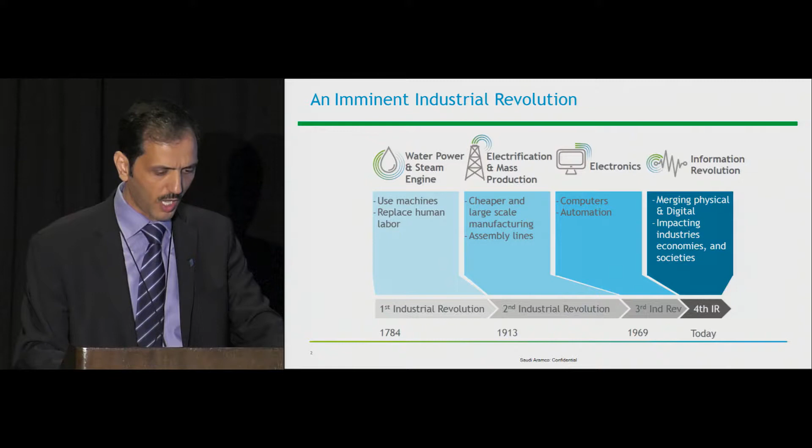And this is because of the advancement that we have seen as industry in artificial intelligence and machine learning as well as other technologies. So the real question to us in Saudi Aramco was how do we react to such, and are we benefiting from these technologies? And this is what I am going to cover in the following slides.

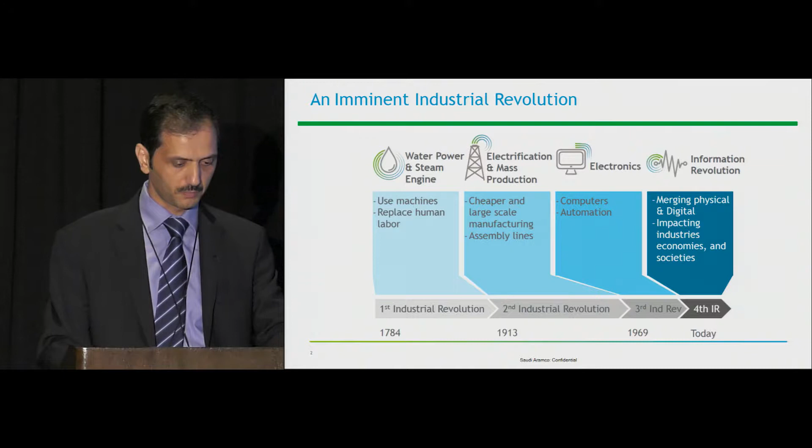Industry 4.0, or the fourth industrial revolution, is stimulated by advancement in three main domains: manufacturing, connectivity, as well as computing. And the main technology enablers under this revolution include but are not limited to big data and advanced analytics, cloud computing, industrial Internet of Things, cybersecurity as an integral part of that, additive manufacturing, augmented reality, robotics, as well as mobility.

The World Economic Forum estimated in their recent study about digital transformation of industries around $1 trillion that the oil and gas industry can generate out of this industrial revolution in the next 10 years. Among these technologies, big data and advanced analytics, specifically in oil and gas, as you know, is the most disruptive technology that we should focus on.

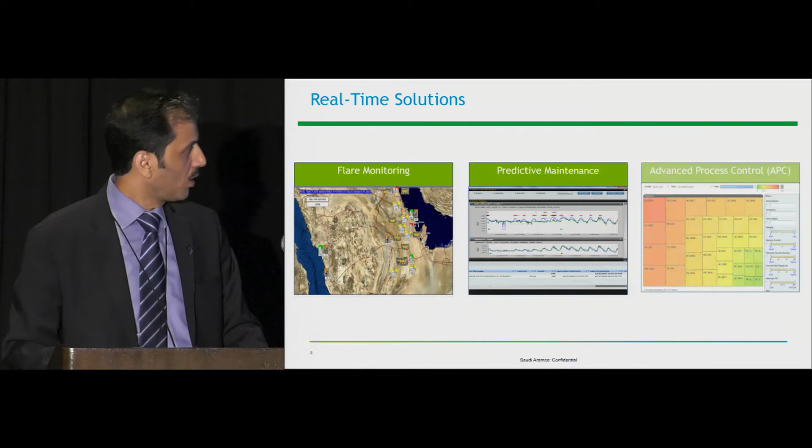This slide shows some of the examples that are running as we speak in our Corporate Engineering Solutions Center. And I will start with this solution, which is a corporate flare system that is a real-time predictive solution to provide ability for us to monitor and diagnose flaring root causes in our operating facilities company-wide.

This system is capable of analyzing issues and equipped with real-time notifications to timely alert any flaring issues, so we can tell not only when and where each and every facility is flaring, but we can tell exactly how much that flaring volume is. The algorithm and the technique behind this solution is patented for Saudi Aramco, and this solution is an integral part of our corporate flaring management program.

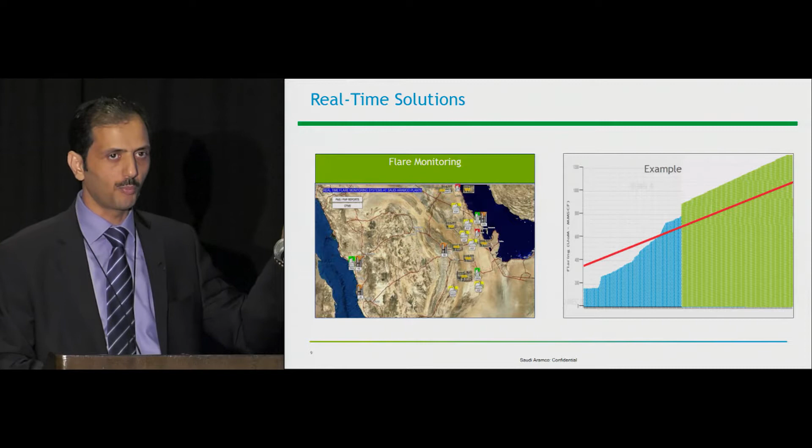The system has the capability to detect abnormal flaring. As you can see on the trend on the right of the slide, the system was able to detect at one of our facilities abnormal flaring happening. Not only this, but it did project the year-end estimate of that flaring, and we have notified the facility that you will miss your year-end target. So proactively, we have worked with the line organization to ensure that they meet the year-end target.

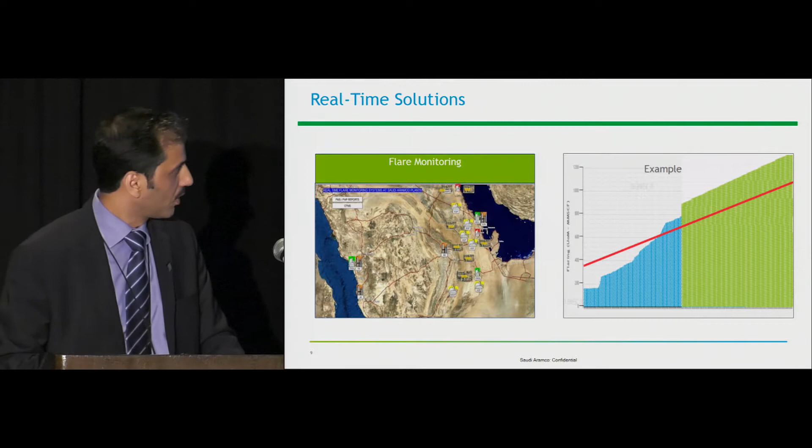Now, let us see how machine learning and artificial intelligence techniques can help us to transform our maintenance practices. We have deployed the predictive maintenance technology to predict asset failures before they occur. The solution combines real-time data with historical data, as well as predictive models to ensure that we are fully aware of failures before they occur.

So based on this detection, which happened almost 2 to 3 months before the failure did occur, we have notified the line organization about that potential failure, and the reliability engineer did advance the shutdown or the T&I for this equipment, and we have saved the plant from unplanned or forced shutdown. This happened because of the advancement that we have seen in the prediction tool.

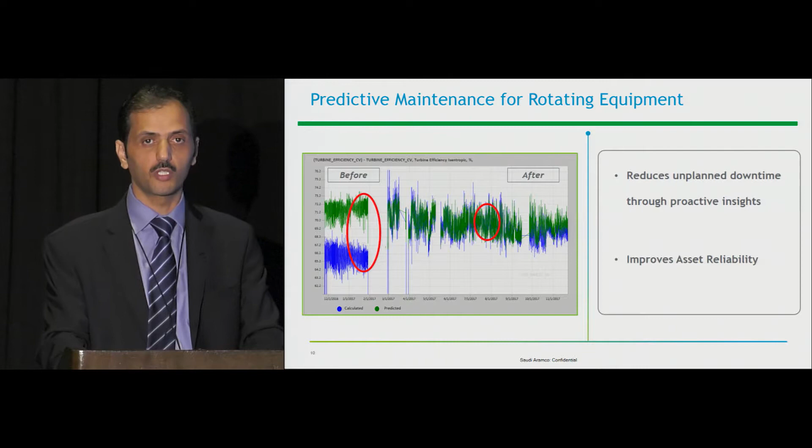This technology is helping us to reduce the unplanned downtime through proactive insights and improve asset reliability, and is now planned to be rolled out at a corporate level. Next, let us see how predictive analytics can implement real-time decisions to optimize our operations. Advanced process control, as you know, is a real-time predictive control and optimization technology that integrates multiple real-time data process parameters and the set targets based on the product prices.

This system is capable of predicting operational scenarios and adjusting the process as required by sending set points directly to the final element in the field. But this is not what I am trying to highlight here. What I am trying to share with you is that the establishment of the monitoring system inside our Engineering Solutions Center has helped us to proactively monitor any deviation from the set target at our advanced process controls.

By the way, in Saudi Aramco, we have more than 100 advanced process controls running in our refining, in gas operations, as well as in the oil processing facilities. And we have integrated as part of this solution more than 20,000 basic control loops in one central location where we can predict the failures or the abnormal situations in these loops and notify the line organizations to work on corrective actions timely.

The number of the advanced process control applications in Saudi Aramco is expected to increase to over 300 APCs or controllers as a result of the planned deployment of new facilities, and the combined benefits from these applications is expected to double in the next 2 to 3 years.

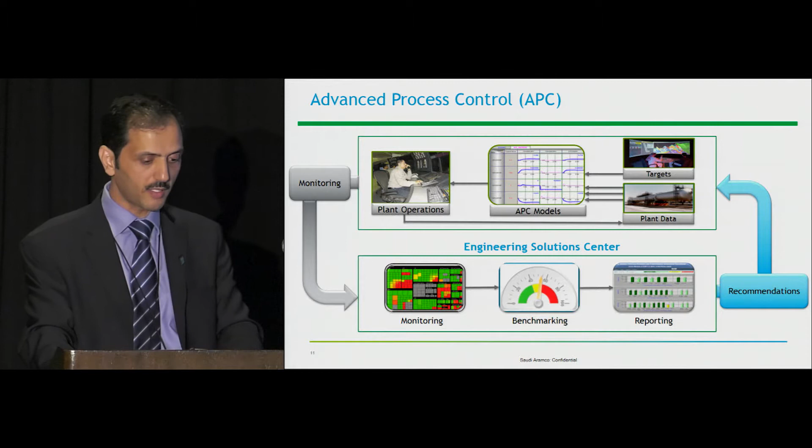A new frontier for APC in Saudi Aramco and the world, actually, is the use of this technology to optimize ESP, or the electrical submersible pumps, for energy consumption. We have deployed this solution in our oil field, and we are moving with our plan to expand the deployment to other fields as well.

We have established a field mobility program also that consists of 18 applications for our operators, technicians, and engineers. These applications cover several domains, including safety and integrity, inspection, operations, maintenance, as well as engineering. Our aim in these applications is not only to go paperless, but also to support our field operators and engineers with intelligent solutions that can optimize field operations and identify abnormalities.

3D printing is a very disruptive technology as well to the oil and gas industry, but it is less mature, as you know, than other technologies. In Saudi Aramco, we have developed a 3D printing program, identifying 9 focus areas that we need to work on, and our top priorities are actually concrete 3D printing for buildings and structures, and metal 3D printing for spare parts. We currently have pilot projects for both of these applications.

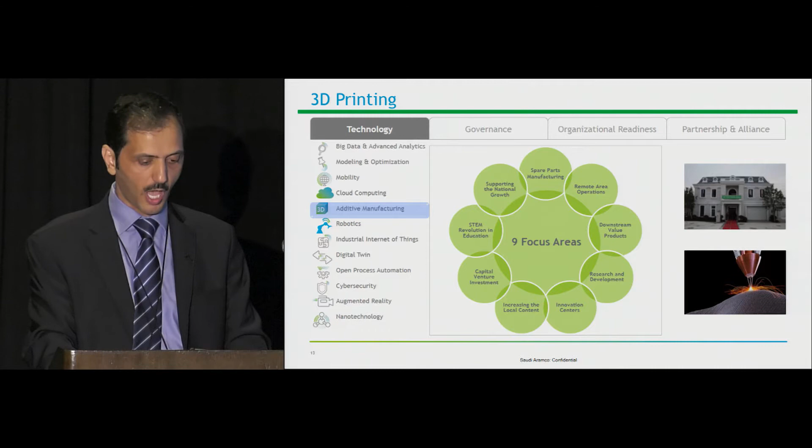Similarly, our robotics program was established as part of our digital transformation, and we have deployed unmanned aerial vehicles, or UAVs, in our operating facilities to inspect elevated structures such as flare stacks. And we have also crawler robotics for inspection of storage and elevated piping and tanks, as well as underwater inspection. And we have also piloted a solar panel cleaning robot that can improve the solar efficiency.

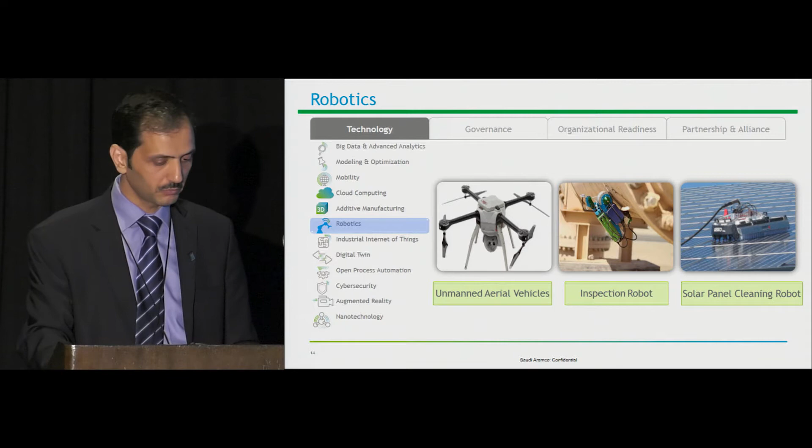As I mentioned earlier, this is a journey of digital transformation, and we have collaborated with all stakeholders in this journey. So far, we have signed 8 MOUs, or Memorandums of Understanding, with leading technology owners, some of them gladly with us here in the ARC event. Also, we are in collaboration with other leading technology owners and consulting firms, and we have established partnerships with local universities such as King Fahd University of Petroleum and Minerals and King Abdullah University of Science and Technology, and we are in close coordination also with other national initiatives at the country level.

So let us now look together at how this technology will come together to help us transform the way we operate our facilities in the future. We expect our operating facilities and plants to be smarter in the near future. We are talking about digital assets and digital plants. We expect our control centers and command centers to be smarter and more intelligent in the future. Also, our operators, technicians, and engineers will be named digital workers because they will be benefiting from

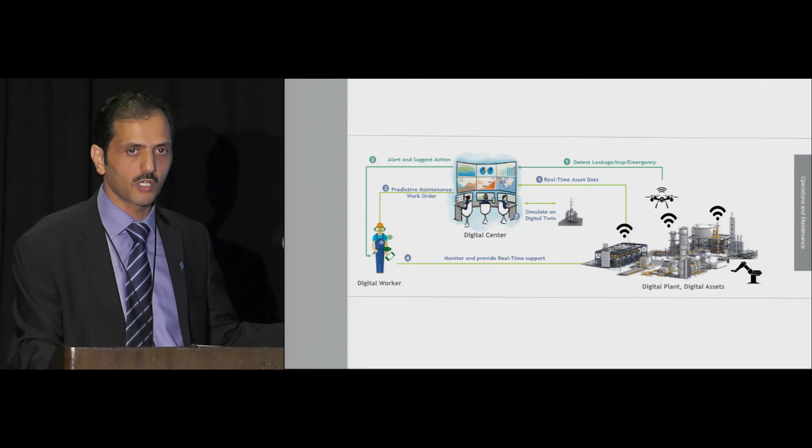these technologies. As an example, the real-time asset integrity monitoring solution that I highlighted in the previous slide will help us to detect leaks, detect abnormalities in the rotating equipment, and send real-time notifications to the control centers, or in some cases to the digital workers directly, proactively, so that they can act on these issues before they occur.

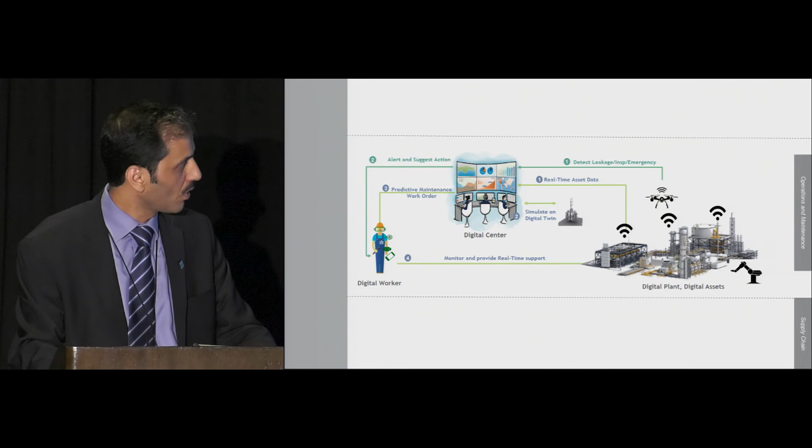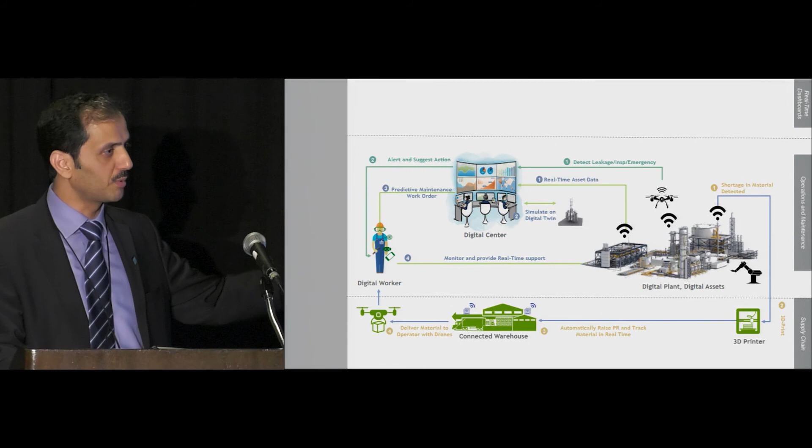The digital plant will also be more self-aware of potential shortages in the supply chain, and it will be able to communicate these shortages to the 3D printing center, for example, to check if that equipment or spare part can be printed using 3D printing. If not, then it can send the signal to the connected warehouse to order the material, and imagine that the drone will be capable of delivering that spare part to the digital worker.

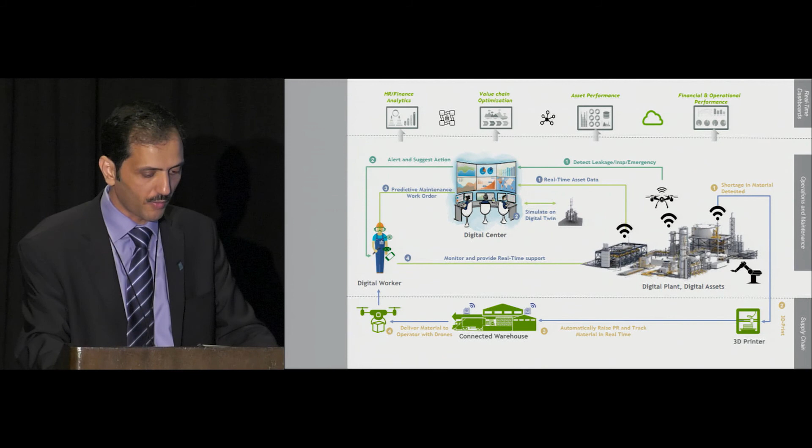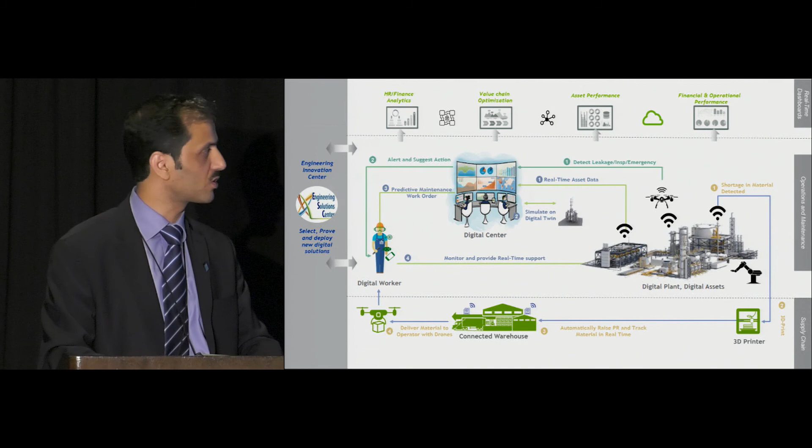The digitally connected enterprise will also enable real-time visibility of the financial and the operational aspects throughout the supply chain. And our Engineering Solutions Center that I highlighted in the previous slide will continue to be an integral part of this digital transformation journey.

To conclude, we believe this is a journey, a journey of transformation, but one that is worth undertaking. We are at the beginning of the journey; although we have achieved a lot in the company, we strongly believe that the opportunities are huge, and we need to capture as much as we can out of this revolution. We are not only preparing Saudi Aramco as the leading oil and gas company for this journey, but we also believe that others can benefit from our experience, which is greatly aligned with the transformation initiative that we have in Saudi Arabia under the Kingdom's 2030 Vision.